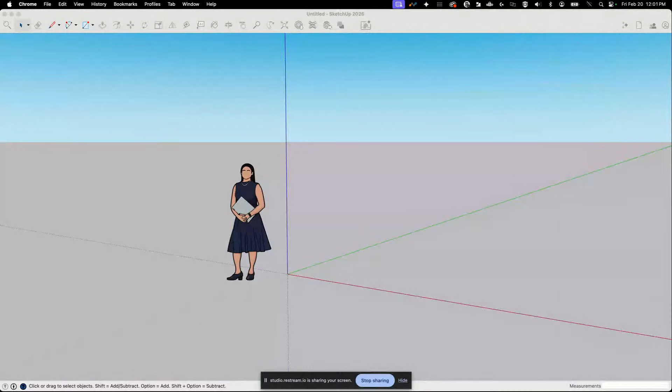Okay, well, hello everybody, it's great to be with you. We've had a chaotic start. Aaron is joining. There he is, just in the nick of time. Better late than never. It doesn't matter how much time you spend setting up or prepping, when it comes time to go live, you're in the hands of the fates. Anything can happen. I had to leave and come back in, so we had to reset up all of our scenes again. That's kind of fun. Yeah, we love doing things last minute. We treat this almost like an improv routine.

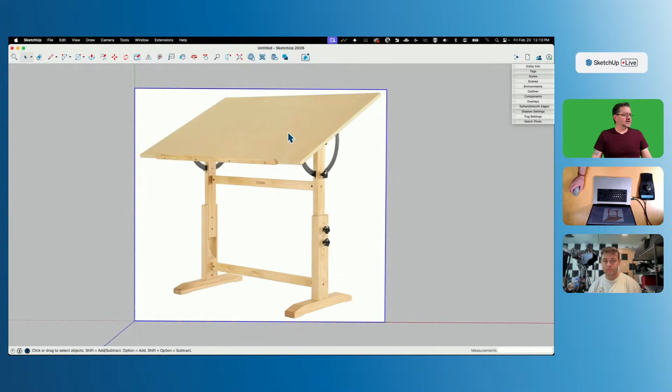I don't know what size this is or anything like that. So one of the things I did was pull up some average sizes of drafting tables that we'll go off of.

Cool. Does anybody have any objections? No? Okay, let's go, no objections. Granted, there's like a 30-second delay between when we're speaking and when you guys are actually watching this, so if the objections come, we've already moved on. Sorry, but thanks for joining in.

All right, so the first thing I'll do is this tabletop. Drawing tables like this come in so many different sizes. Thinking about architectural drawings and draftings, the size I was most used to working with was D size, 24 by 36. So I'd want a table at least big enough to put a 24 by 36 piece of material on, so we'd go bigger than that. I'm thinking maybe 30 inches by 42 inches. So I'm going to go 30, and then come this way, 42.

And it's occurring to me just how oversized this is. Maybe we'll bring this down a little closer to scale, just scale that down a little bit. There we go. All right, so there's our tabletop.

Cool, I'm gonna go to save. I'm doing it earlier and earlier just to try to get ahead of you guys. Yeah, we didn't get a single comment so far, so ha.

Okay, so step 1, draw a rectangle. Step 2, finish the whole table, right? Two-step process. All right, so let's give this a decent depth, maybe like 3/4 of an inch. Something like that. I like it, I like it a lot. Cool, all right, I'm gonna triple click, make that a group.

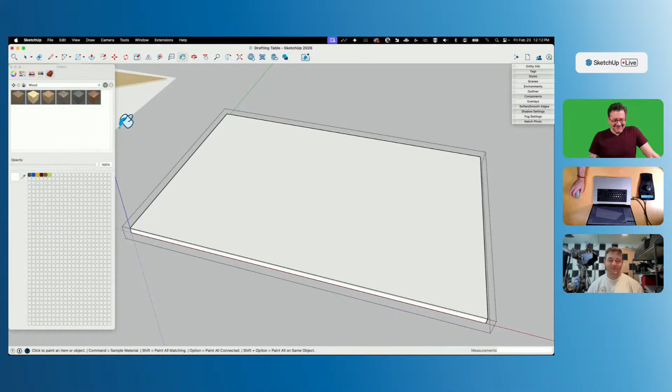All right, so with my default materials, I do have some good wood-looking materials, but it's not the kind of material you'd pick for a wood finish. Knots are kind of fun, but definitely not something you want to draw over, probably. The rest of the default materials are kind of veneer materials, which would be good for flooring or something like that, but that's pretty nice.

Well, what I was going to say is a general comment: when you go in to use these materials, don't get hung up on the color, don't get too hung up on the texture, because all of that's adjustable.

So you can see when you look at this, it kind of has this realistic smudge, like scuff marks. I would believe this would be on a floor, like some architecture students finished their finals on this table. Yeah, I could see it.

So I do like the lighter color of the wood here, so I'm going to make it a little bit lighter. We're going to see if this works. If it doesn't work, that's where we can always hop over to 3D Warehouse. So let's see what we can do with this. As soon as I put this into my model, it shows up in my home, my default materials over here.

Why so many samples? I don't think I need this many. That's an insane amount of colors. I'm not sure how to change the size or anything, never really messed with that before. I guess I'll just slide it down now.

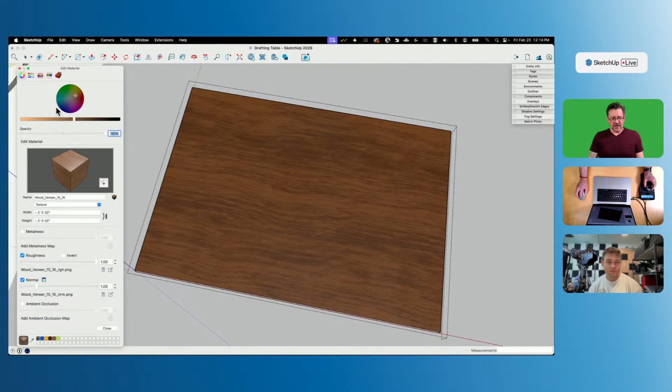So we're going to start by pulling it lighter. Not too bad, but once you go past about here, those browns turn orange, and that's too much. So I'll come over here and slide this a little more towards yellow, towards white - oh, I'm into green already, back it up, back it up.

But it is pretty nice that you can essentially take any material and customize it to your heart's content. It is, it's very cool, it's a nice way to do this.

Right about there - that looks pretty good, I like it. Still has a little bit of that smudge, but it looks like it's kind of been cleaned up a little bit. But what am I saying, that's smudgy - we definitely want it, it's the lived-in look.

Yeah, it's used. I honestly wasn't planning on using that, but when I saw the way the light played across the top, I had to do this. When you know, you know.

All right, so something else I want to do now - we're going to get a little silly. Buckle up, get ready. So if you notice, this whole thing is made out of plywood.

So you can see the lines. Actually, I think these might be solid pieces down here, but all of this is plywood - you can see the veneer or the layers right down here.

So I want a wooden lasagna - are you about to do your own layers? I'm going to do that. Here's how I'm going to do it: I'm actually going to do this on a sample piece over here because I don't want to have to be flipping sideways and working on something small.

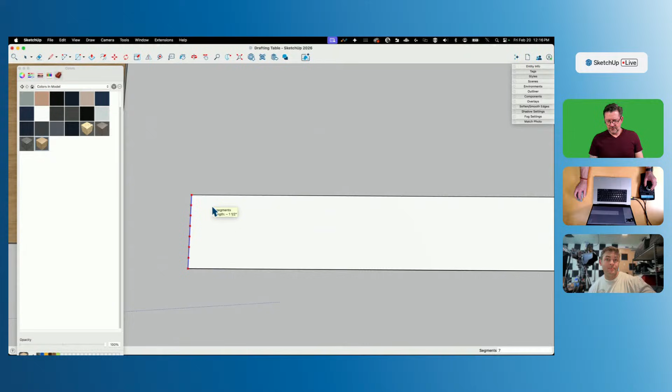So I'm just going to create a rectangle like this, and then I'm going to say divide to that many layers - that's 7, cool. Then I'm going to draw a line down here, take that edge right there, and say copy that to here 5 times. And there we go.

Now what I'm going to do is use this - I'm going to say I want to sample a color, but I want to sample it right from here. I can't do that because this is an image right now, so when it's trying to pick, it's trying to pick an image. What I've got to do is use this little icon - it's slightly different in Windows, but there's a separate icon for the eyedropper that lets you go into sample mode where I can pick any color and it'll give me that as a solid color.

And now it's in my bucket. I can come over here and drop that on every other one of these stripes. Then I'll come back over here again, pick that again - we'll go pick the lighter stripe.

And that's in the bucket. We'll come drop that there, and there.

The sample tool is a wonderful way to get some really nice organic colors in your model. Even if you find a reference image of a scene or building that you really like the overall color tonality of, you can reference the colors in that photo and end up with something much more subtle than the stock colors that come with the Apple palette. The sad fact is that most of our life is in a grayish hue, not the bright colors that show up in the palette.

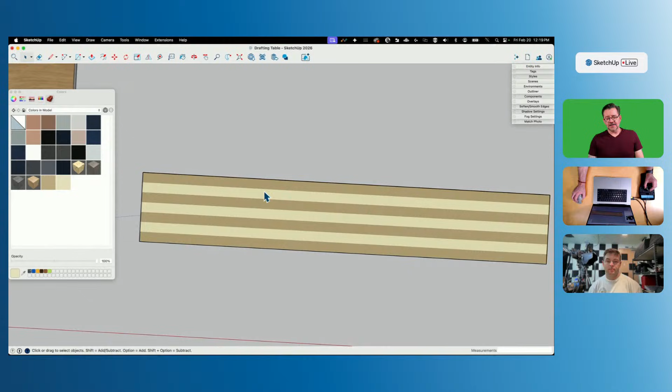Separate actual imported materials, we'd have the ability to create combined materials. Since these are actual just colors, what I'm going to do is go up to view, camera, and go to a top view. This is going to assure that I'm looking straight down, everything's orthogonal, so left and right are straight across, up and down on the screen. Because this is flat, I don't have to worry about going to a parallel projection versus the other one.

So what I'm going to do is just take a screenshot of this material. I'm going to come in here and try to grab it right below the black line, pull it over here to right above the black line. There we go, and there's my screenshot. Now that's just going to get saved to my desktop as an image file.

So the next thing I can do is zoom in here. I'm going to come into context so I have this surface, and I'm going to say File, Import. From the desktop I can just grab that. I don't want to import as an image, I want to import as a texture. Say Import, and I'm going to tell it to go from here to here. And there we go, it's nice that it just tiles like that.

Also, good job cleaning up your desktop before the stream. Yeah, I'm getting better at that.

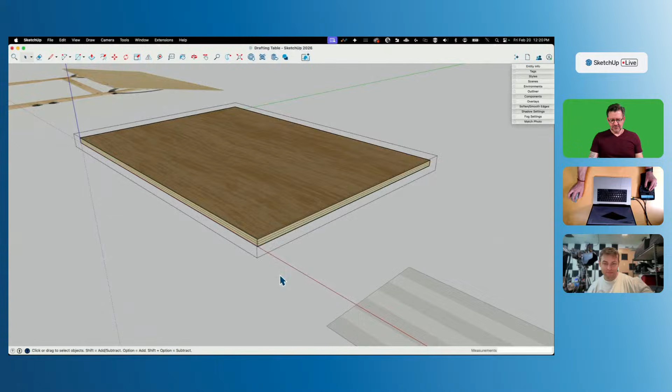So there we go. Oops, I think I did that wrong. Alright, so I'm going to pick that, drop it on each of the sides, and that's going to be our tabletop done.

This is now part of the job, so this material is actually part of the job. If I come in here and look at this piece, for example, now that I look at this, I thought that was laminations, but it looks like that's a solid piece of lumber too. That's actually grain. But if I wanted to make this a piece of laminated material, I could actually scale that up so the laminations look larger or smaller, and reuse it in different scales. So that's kind of cool.

For us, we do need this little shelf paper catcher. Yeah, I don't know what you call this thing.

That's where you rest your pencils. That's right, and let them roll down and go till it hits that. So we're gonna do that. That's where you hit your funny bone accidentally. I was actually noting how they had rounded off corners. Yeah, I'm like, that's somebody with experience did that. That's right, that's design intention, folks. Yeah, that's what we bring here.

So I'm gonna go find the very middle point. So this is 3/4 of an inch up, so I'm gonna say maybe like 1.5 inches. Is that too high? That might be too high. See, 1.5 inches up somewhere around here. That's too much, that's just ridiculous.

Yeah, I'm thinking 1.25 inches. Okay, 1.25, enter. There we go. Okay, that's how high it's going to go.

And then I'm going to run it over here. I want to go the full length because I don't know why they don't ever go the full length, but they don't. So I'm going to come over a nice round number like 1 foot 3 inches.

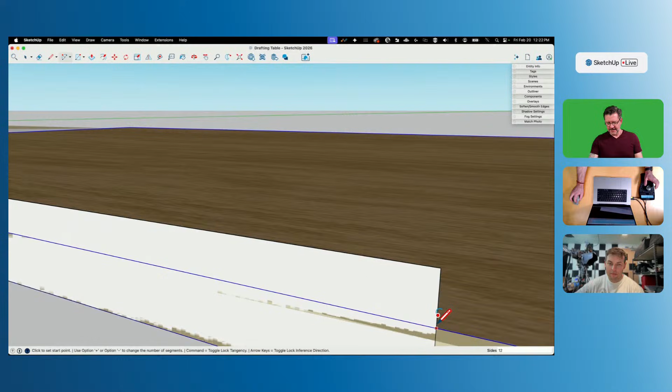I'm going to drop that down, bring it over. There's my face. And I'm going to round that corner off now. So I'm going to come here to A, put an arc from here. I'm going to let it go to tangent. Click twice. There we go.

Now I'll take that piece and I will mirror a copy of it because I want to keep my original right here. Get rid of that. Then pull this out, probably like a quarter inch maybe also. See what that looks like. That looks good. That'll work.

Cool. All right, so I'm going to grab all of that, soften it real quick. So get rid of that. And then I'm going to say, okay, now let me sample this material.

Nice, there we go. Now, one of the things I could do - oh no, it actually turned out pretty good. Looks like right here is a little off. If I want to control the orientation of materials on broken faces like this, it can get a little tricky.

So there's a couple ways to do this. I'm going to do it. It's probably more work, but it's probably the quickest way to do this is to reorient this one on the flat and then just copy it and paste it up on each of these segments.

So I'm going to do that real quick by first going to View, turning on Hidden Geometry. Then I'm going to click on just this rectangle right now. Hidden Geometry makes this, what was a joined surface, into individual faces here that I can work with.

So I right click, I'm going to say Texture, I'm going to say Position, then I'm going to right click and I'm going to say Rotate 90 degrees and Enter. Okay, so now that's going the right direction.

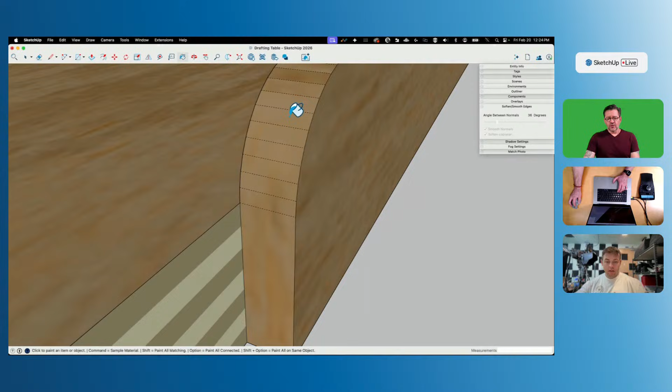So to get on each of these, I'm just going to sample that, sample that, sample that, sample that. So this is one way to do it. One of the other options I could have used would be to create a projected texture, or multiple versions of the same texture projected from different directions that I could then have applied, but I didn't want to.

Yeah. Looking good. Are you going to add the screws?

Maybe we'll come back and do connectors after. Yeah, no, you're right, I'm getting too caught in the weeds here. Forget that we have an entire rest of the table to make, and we're already almost 30 minutes in. I know the tabletop went so smooth, you would just think it's all going to go wonderful. And I hope so, I hope you're right. I hope Justin is on the ball with that optimism. Yeah, we keep shifting who has the sense of confidence in this room.

All right, so I'm just going to leave it right there for right now. I'm going to go to View and turn off my Hidden Geometry. I'm going to triple click. I'm going to make that into a new group.

Could you make that a component? Yes. Would Dave have made that a component? Probably. Did I? Apparently not. Yeah, that's all I can say.

All right, cool, so there's our top. I'm going to take these two pieces now, and I'm going to make them into a group. And that's just going to keep them together, so if I move one, the other moves with me. This is just basically assembly grouping. There's nothing to that as far as parts or anything like that where that's important. It's just keeping those pieces connected as I start moving them around.

Because what I have to do is I have to lift them up off the ground, and then I'm also going to tilt them, and I don't want to do that one piece at a time.

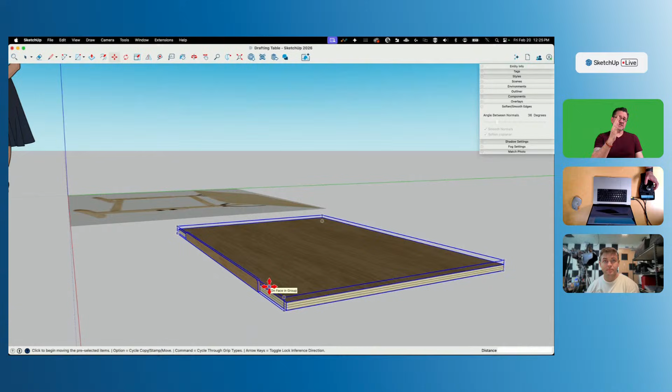All right, so let's talk about height. So if we're at a standard height, then this would go vertical about 36 inches. So it'd be that high off the ground being right here. That's a standard height for a drafting table, which I think is like stool height, 3 foot. Does that sound right? I think so, sounds right. Yeah, we're gonna say that's right.

And then the other thing I want to do is I want to give it some angle. I want to have it come up.

Drafting tables usually go between 0, which is flat, and maybe 45 or 50 degrees. I'm going to grab it by this corner and rotate it up, let's say 35 degrees. That looks nice. So that's 35 degrees, 3 feet off the ground to the bottom, tilted up 35 degrees. I like that, let's build a table around that.

Okay, next thing we got to do, let's start at the ground and work our way up now. I'm gonna come in here and draw some feet. There's probably a rule about how wide feet are compared to the table that supports them. I think they're less than the table when it's flat, but I don't know, I'm making crap up now. Since when do we care about rules here? The SketchUp Live, that's right.

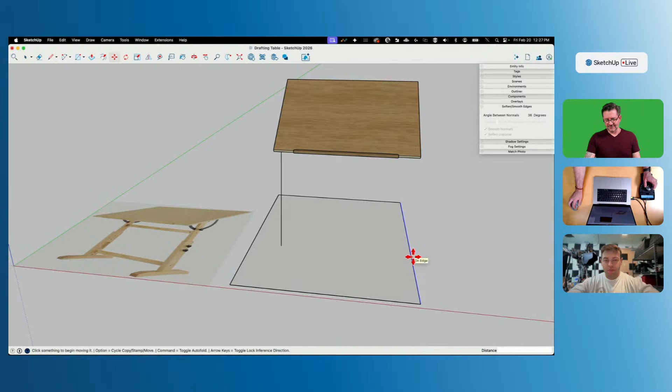All I'm going to do, I have my ground plane here. This is just my temporary ground plane, just so I have something to work off of. Not a requirement, you don't have to do this. You could always use the origin as inference for where 0 is. I like this because it's a quicker, easier thing to snap to. So yeah, I'm doing that.

I'm going to put some feet on here and just kind of eyeball this and see what I think is good. If that's from the middle, it comes out a foot. Let's see what 12 looks like. You're just drawing straight on the ground plane, huh? It's drawn on the ground plane.

Nice, that's right, then we'll come this way. Maybe this is made out of nominal, like a 4x4 or something. We'll say it's like 3.5 inches and come back this way, 24. I don't know if this is going to be big enough, I think it's going to have to be longer than that. I think that actually looks pretty good. That'll work. All right, Justin signed off, we're good.

All right, so I'm gonna take that up 3.5 inches. I said maybe this is a 4x4 you got in the reclaim bin at Home Depot or something like that. What I want to do is come in here, I kind of like this detail, it's cut off at an angle. You have a little bit of a step up, there's a reason you do that, I don't remember what it is.

You got the angle and also a little bit of rounded corners on the angle. It's nice, I did see that. The best of both worlds. That's good stuff, that is good stuff, that's great, great design.

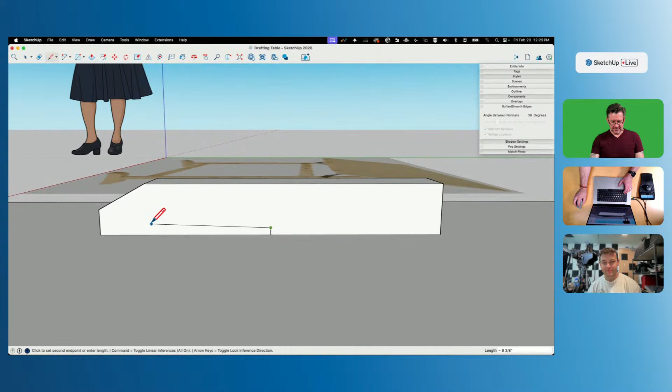From the middle here, we'll go up like 0.5 inches, come out to here again, drop down. Now what I'm gonna do is grab this edge and this face, and we're just gonna mirror a copy of that to there.

Yeah, and to mirror the copy, you're holding down a modifier key, right? Right, that's right. And yes, we do say modifier key rather than calling out what the key is because it is different on different operating systems.

All right, so a thing I just did, I drew all that, which I mean this looks good, I like this, this works. It's definitely thicker than, or maybe not, I don't know, I don't care, I'm doing my own thing.

Because I drew this on top of this plane and pulled it up, this is all one piece right now, so I never grouped it. What I should have probably done is as soon as I drew that first rectangle, double click, right click, and hit group then. Dave R has already called you out, should have grouped the face on the ground plane before starting on the foot. Yeah, absolutely, Dave R, keep us honest here.

And so I see that you've turned that into a group. Would you consider turning that into a component so you don't have to do it twice? Absolutely, should have from the start. Make component, I make mistakes so you don't have to. Foot thing, yeah, we'll just call it the foot. I don't care, it's mine, I can do whatever I want. All right, so now that we have that, so what I created, a thing.

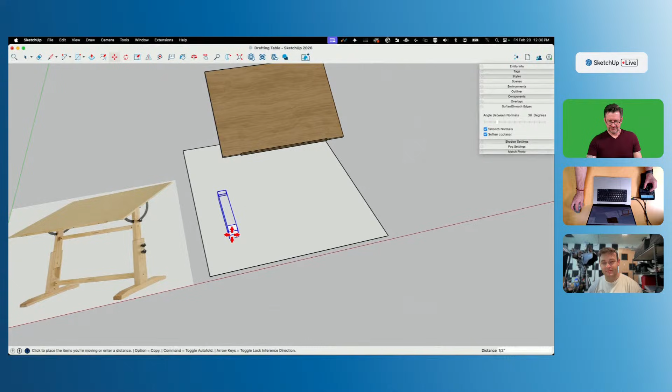Okay, we're good. Oh, this is an interesting thing that's happening. Let me explain. So if I take this and slide it over here, this is a solid plane. This is an object with open ends. But if I drag that back onto this surface, look what happens.

It cuts holes in there. So I inadvertently made... let's go to components and edit this one. I accidentally made a component that glues automatically to flat surfaces and then cuts an opening out. So if I dropped another one of these in right here, it would cut that opening too. I didn't mean to do that. That was not on purpose.

So there's a couple things I do to fix that. The easiest: right click and say unglue. Once I do that and we move it off, we should be good. I'll turn off cut opening also in the component's properties. Now if I move it back on, I think this will still work. Yeah, there we go, see how it stayed on the outside. It didn't cut the opening again.

So sometimes you do fun stuff in SketchUp and don't even know you're doing it. I know, but the cut opening thing is really nice if you're ever putting windows on the side of a building, it prevents so much modeling work. So for sure, it has its merits, but not with table feet. No, that's not where you want to go.

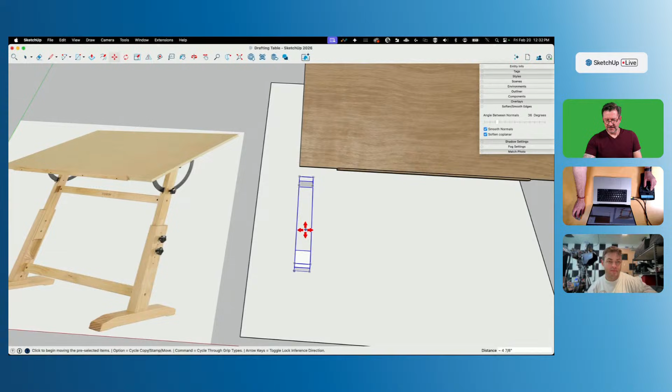All right, so I'm going to bring this initially out flush to the side, and then probably not all the way out to the side. We want to be a little bit back because I don't want this sticking out past the tabletop. So maybe I'll move it in like 4 inches. Okay, looks good. Yep.

All right, I'm going to come in here, double click, fill all connected faces with that wood material. Whoa, things got silly, I'm going to undo that. I'm going to do one at a time instead. I don't know why that happened. Keep me on my toes.

Now I'm going to fill the rest of this with... I don't care what. There we go. Okay, so there's our 1 foot.

I'm only going to build half of this, and then I'm going to throw that all into a container and copy it over. There's no reason to copy each piece as I go.

So with this next section, I made this a little wider than this. This looks like it's maybe a 2x4 material, and then this is maybe a 2-inch material, something like that. But I'm going to make this lower part out of the same 4x4 size material here.

So what I'm going to do is grab a rectangle and come to this middle point. Just come down this way, catch a middle point off of here, bring it to here, right there. Hit the modifier key to draw from the center, and then just pull out till I get a square, 3.5 by 3.5. Where are you at?

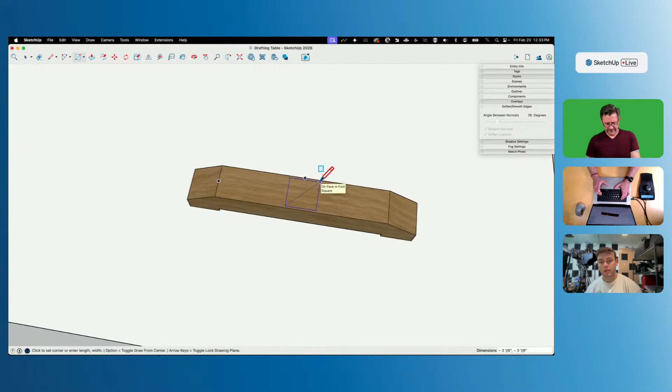All right, 3.5, comma 3.5, there we go. Cool. And then we'll bring that piece up 1.5 feet. Yeah, 1.5 feet. All right, there. Cool, looks good. I'm going to save.

Yeah, good call. Yeah, so I do good things.

All right, so now what I need to do is we're going to put a pocket in here that this piece right here will run into. So this is going to be a little weird because this will be awkward. I think you can offset that. That's true, it's like 3 sides. It's like these 3.

Offset like a half inch on each side. Let's see what that looks like. Yeah, I'm going to say 0.5. There we go. And then I'll take that face and push it down like a foot.

I like how much of the stream is just kind of loosely seeing what feels right and then being like, yeah, that's the dimension. It's sculpting, man, it's crafting. That's right, shooting from the hip, modeling from the hip. Sometimes you think too much, but not here.

Yeah, all right, so I did a fill all, and that's become, as I'm using more and more materials, I'm using more and more of these built-in commands like that. So when I come in here and I say okay, I want to fill this, holding the option key says fill all connected faces, everything's the same material. So if I just click right here, it fills one.

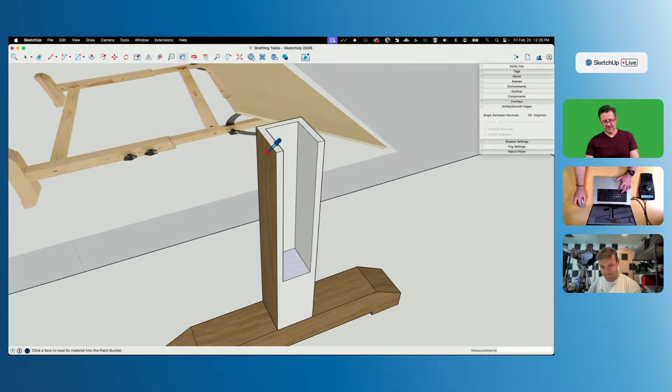If I hold down my modifier key and click there... I gotta undo that. It's going to fill anything that's connected with the same material, so in that case, that's all those white surfaces. I like that, because I can't tell you how many times I'll click into a group, select all of the geometry, and then paint it. So it's a nice little hack. Much, much better.

A lot of these turned out right, ran the right direction. I don't care so much about the end, to be honest, but that looks okay. Down here, I feel like this grain needs to run the other direction. I don't know, I guess it's right either way. This one's definitely not, so I would right click, texture, position, right click again, and rotate it 90 degrees. Nice, and then that should be right. This one's probably gonna look wrong either way, but we'll cover that up. It's end grain, which we don't really have an image for, but you won't see it.

As I'm looking at this, I'm going to make this back wall a little bit thicker, just to give me a little more meat to put some screws into. I'm going to triple click and make that into a component, and I'm going to call this the lower leg.

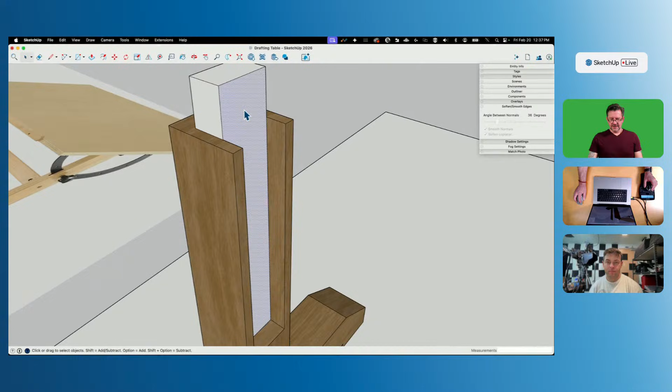It's coming along, yeah, that's right. Now we're going to do a new rectangle right here. Oh, that would be a big piece of wood, we probably need to make that smaller. I'll bring that up like 14 inches. I'm playing with stuff. I know, we're sculpting, that's right. And then make that a component.

I feel like you've gotten really proficient at using materials and also naming components. That's a tough thing, I sometimes get a little lazy, and before I know it I'm trying to find component number 96 or whatever, and it's tough. It's years in the making right here.

Oh actually, I'm looking at that bottom, the lower leg, and it kind of looks like it's curved. I was wondering, was that my distortion? No, like where the upper... oh yeah, it slides in, cuts in there. We could make that happen.

I'm gonna make this a little bit longer first, another 6 inches. Maybe this is another 6 inches too. Yeah, something like that, we could definitely add that. Let me think about this, we'll come back in here. How long is this? 2.5. So I'm going to push a copy of this down 2.5 inches, 2.5, enter.

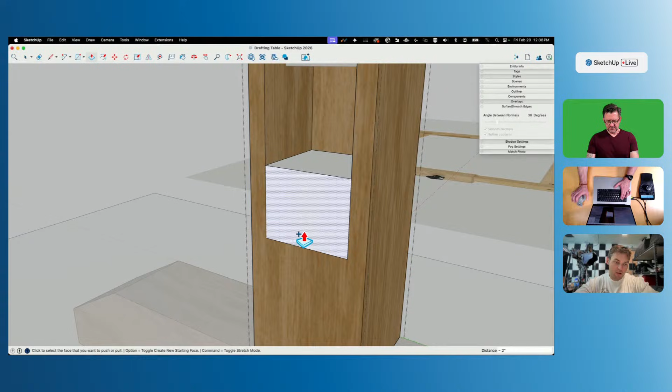If I erase this, now we should have a nice surface to work with. I'm going to grab an arc from here to here, and then pull it back. I'm not really too worried about tangent. There we go, and I can just pull that straight across to there.

Nice, oh that's a cool little thing that happened there with the texture. Yeah, so we got the same thing we had on the side of the pencil, not rolled off a machine thing.

So I'm going to do the same thing. We're going to go to view, turn on hidden geometry, and then just real quick, I'll sample this and say here. And just drag that material across. We're just clicking and clicking.

Told you, we talk a lot, but we're going to have much more clicking. Dave R is chiming in the comments with how he would build this, and I promise you that is a more practical approach. But he probably would have thought about it before he started clicking. That's the difference, we're doing it live, Dave R. That's the difference between me and everybody else who would be doing this, they would probably do it smarter.

Okay, that looks pretty good though. Oh, looks nice, looks nice. Don't forget to save. Let's save it. So we have 3 components here.

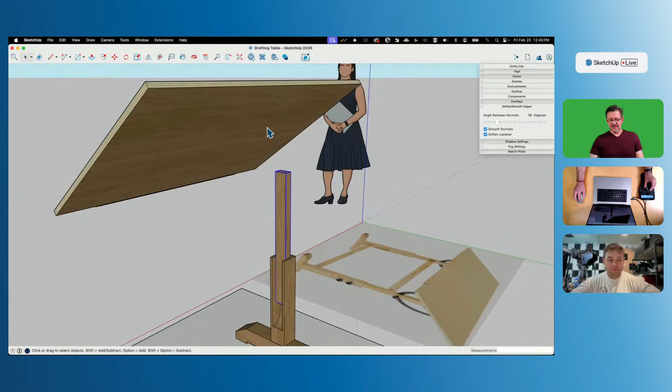Making up this piece, and I just kind of ran this long. I don't know where this actually needs to go, but I think actually both of them need to be longer, because if this is 36, standing height would be a little taller and sitting down height would be a little lower. So we need to give a little bit more length. I'm going to grab the top of my lower leg, give it maybe another 4 inches, 6 inches.

Yep, and then slide that up. Give this, grab that, slide that up. Is it hitting at 4? Oh, it's coming real close at 4. So I'm gonna say, yeah, about 4 inches. Cool, all right, looking good, looking cool.

I don't like this, I feel like I want to round that. Yeah, so I'm gonna... why not? Why not indeed, it's Friday. It's Friday, do what you want. Yeah, do what you want.

So we're just gonna go, whoops. I'm gonna inference off of this, pull it straight across. Whoop, whoop, whoop, sorry, got a little jumpy on the old 3D mouse there. Okay, from here, and then can I inference straight across from? I guess I can't, so I'm gonna have to draw a line from here to here, and then draw an arc from here.

We're gonna draw a line from there. That's interesting, it's inferencing off of this point, which I don't really want it to do. So I'm just gonna stick another line right here and see what happens. Now can I inference without? There we go, now I'm inferencing in the right spot. Sometimes software tries to be smart, and you gotta get some human smarts up in there.

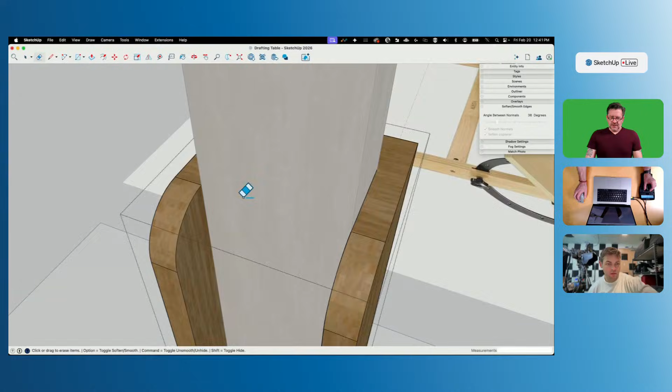Ty says, I'd build this by surfing the Craigslist free section.

Well, that's a much better deal than what I'll charge you for this, especially since I'm making this out of $300 sheet plywood. Yeah, this is some nice birch. Not a bad idea, not a bad idea.

All right, cool, so I don't want to go into a whole lot more detail there. Because what I want to do now is, it's not showing under here, but what I'm assuming is happening here is there's some sort of a hinge piece here that this top can move back and forth on. And then that's where this piece of metal allows it to, at certain degrees, be screwed in and tightened.

So as I think about that, what we basically want to do is go from the middle here straight up till it hits there. And then something between here and here is going to create a hinge. I'm also gonna check and see where the middle is here.

That was the wrong direction. All right, try that again. Find the middle, draw a line straight across. There we go, oh yeah, we stayed in line. That's good, yeah, good to know.

All right, so what we need to do is, I'm trying to think of what would be the best way to do this. Probably just like a bent piece of metal. So round this all over, a bent piece of metal, an L plate that hangs down, and then a bolt through it would be probably the simplest thing. So we'll do something like that.

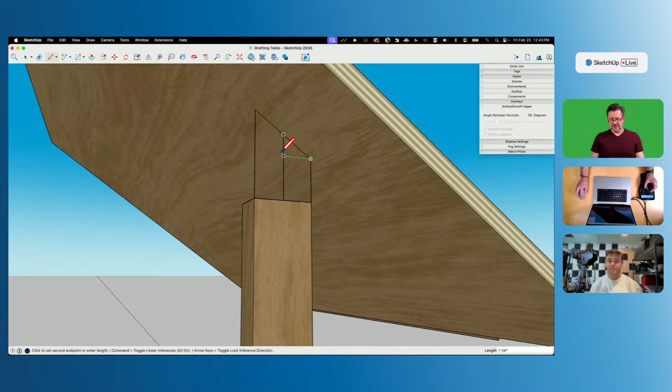I'm gonna go from here straight up till I hit, go from here straight up till I hit. All right, and that's gonna be one piece of plate. That will go to here. So this, I'm modeling in 2D right now.

So something like that would be what my plate looks like. Then this piece would just come up and round over inside that, and then we would have, yeah, then stuff would happen. All right, let's start here, like that. Push that across to here.

Gabrielle on YouTube says it's not hinged, it's usually more of a track. That's interesting, let me think about that.

Yeah, oh, this probably wouldn't be at an angle. This would be flat too. This would not be, this is wrong. Okay, we're good.

A track. Because I'm trying to, again, I'm reverse engineering this. Because if it has to stay in the middle, if this is a perfect circle, half circle here, then the pivot point would have to be directly in the center of that. And this wouldn't be structural, this wouldn't be holding it up. This would just be adjusting, locking it. So the actual connection would be structural, be up here.

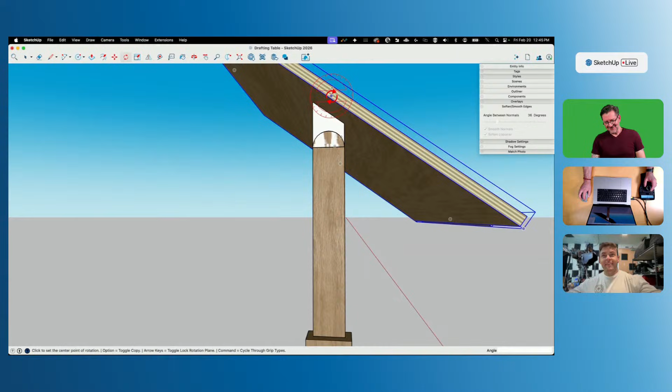I'm going to rotate this, and we're just going to rotate it flat. And I'm going to build my bracket flat, and then that's not quite flat. Flat-ish, flattish.

Go grab this point and pull that point to on axis. There we go, that's flat. And that's going to change this, because this edge is going to go straight up to where it hits, and then this edge, which went right through the top, is going to drop down vertically to where it hits. Something like that.

Coming in here, I'll probably grab this piece, bring it up more so it overlaps better. And then come back out here. Maybe we'll even do something like this. We'll put a circle right here. Get rid of that, and then we can bring that vertically to maybe here.

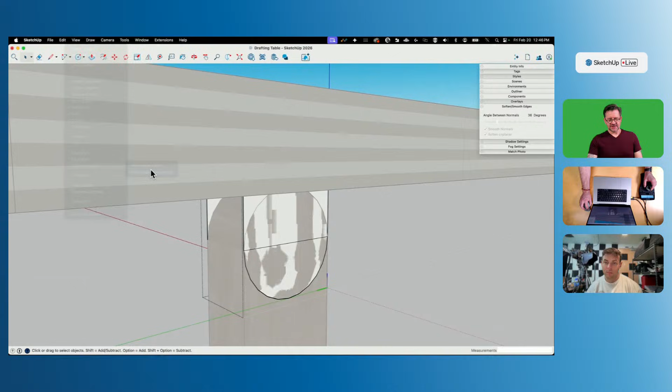And I'm going to triple click all this and make a new component. Let's go to view, and we're going to go to component, edit, and hide rest. Nope, that was the wrong one. Hide rest of model, that's what I wanted to do.

All right, I'm going to take that piece across to here. And worry not, you worriers out there, I am not going to leave this as an infinitely thin piece of metal. We will bulk this out. So everybody calm down, just relax. It's cool, man, we got this.

All right, so I'm going to put bulk onto this. I'm going to come out this way, not a lot, like a 16th inch. This is not like, I called it structural earlier, in that it's holding up a piece of wood. So get a good strong piece of steel at a 16th of an inch.

There we go, nice. I'm just going to go draw a line right across here, get a nice break point. And then there's a couple ways I could do this. I could try running cleanup, I could run solid inspector. There's a couple ways, but as it's a couple of edges, just coming in here and erasing these extra pieces is probably one of the quicker ways to clean this up.

Your choice though, kudos for cleaning it up in general. I feel like I would have just painted it with a really dark metal. Or you could just soften and smooth the whole thing. Exactly, there's lots of options there. Yeah, but like we talked about, I'm a new guy.

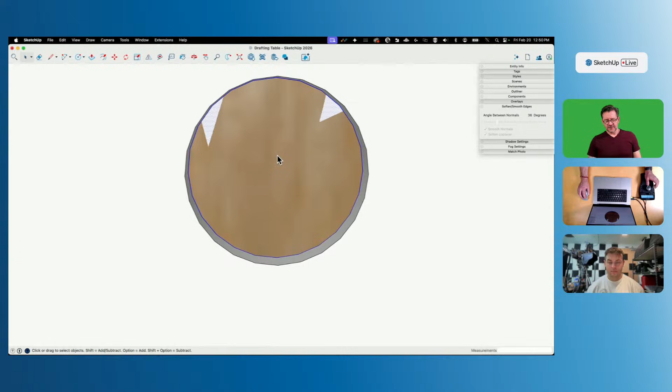This is the way I'm going to do it. I'm going to come in here and draw a new circle. I'm going to inference the center of this circle, pull it out to here. Then I'm going to double click, not right click, I'm just going to go up to edit and say cut. Now I'm going to double click on this piece of wood, I'm going to say edit, paste in place, and that circle drops right onto that face. Now I can just pull this across like that. When I come out here, there we go, my holes align.

Yeah, that paste in place is so nice. It is one of my favorite commands for sure, not just because I regularly forget that I'm editing a component and have to copy and undo a bunch and then paste in place. It's nice. Oh, it's nice. Keggy's asking for the keylogger. Yeah, I didn't want to interrupt your flow there, but good call, Keggy. Yes, I can, yes I did it again. Yeah, you're about to see how terrible Aaron is at typing.

That's great. I finally have a decent excuse for why I type so bad. If you use a MacBook, it has this incredibly ultra thin keyboard and the keys travel about a 32nd of an inch or something. And I have a mechanical keyboard on my desk, and I think switching back and forth is causing my typing to get even worse. I'm like, nope, move your fingers more. Nope, move your fingers less. I'm not good at it.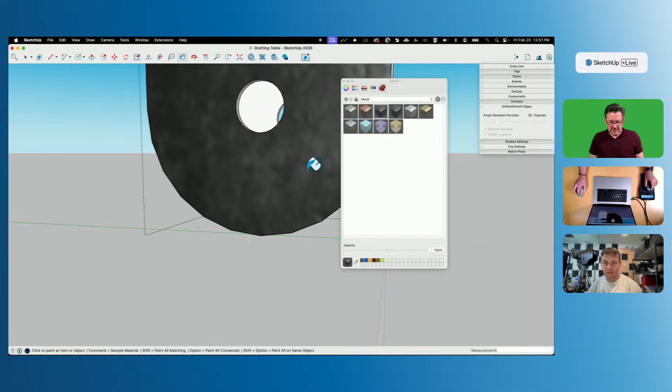Anyhow, moving on. I'm thinking a nice black metal to offset against our light wood might be kind of cool. So I'm going to grab my paint bucket again, go into the materials and find a nice metal. Oh yeah, maybe this. That looks good. I'm going to color the whole thing with that dark metal, and that's my metal color. I love that industrial look.

Paracad on YouTube says when he creates circles he uses like 96 sides. Is that too many sides? It depends on what you're doing.

I think Aaron and I would both tell you it really depends on the level of detail that's appropriate for the model. If you're modeling something as small as what Aaron's modeling right now, you maybe don't need that resolution. But if you're doing something much bigger, it's nice. If you have too many sides on your circles, it might bog down the model a little bit. In general, I feel like you should try to keep your models as lightweight as possible. But hey, I'm with you, I like a smooth circle too. So sometimes 96 sides is great.

I won't argue with 96 sides. I know some people go in there and put 999 just to max it out. Don't do that, that's not the way to do it. I didn't even know you could have that many sides. That's the max, 999. But 999 is a terrible number to use because it's not evenly divisible except by 3. So actually 96 is pretty conservative, good job, that's not too bad. I'd say if you were working back in 2017, that would be a lot of extra geometry, it would probably bog down. But SketchUp's more performant now than ever before, so I'd say you're probably okay.

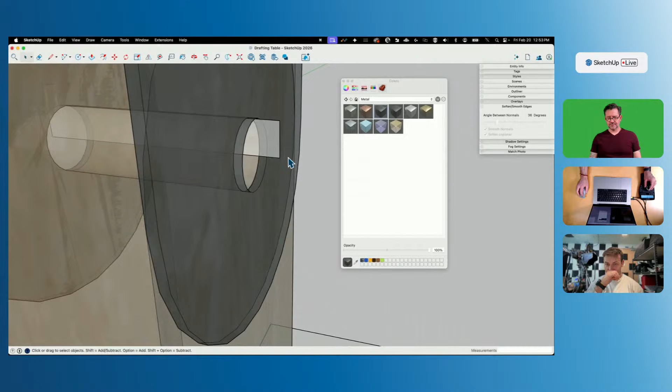While I went on my little monologue, I see you've created a shape you're intending to use Follow Me for, right? So you've drawn a profile. I'll grab this circle, we'll say Follow Me with this shape, because this is some real magic there. Kind of a bolt looking thing right there. Nice, that looks great. And then I can get rid of this.

I will triple click here, and first, before I do anything else, I'm going to color it with that same black powder coated metal, maybe. And I will make that a new component, and I will call this hinge bolt.

I did toggle on X-ray. The reason is this dark metal is actually kind of hard to see lines against. If I click right here, it's very hard to see that line. That's not bad, it happens, not a big deal. But if you run into that, a couple options are X-ray, because it makes everything lighter, easier to see lines and edges. The other option would be to go up to View, Face Style, and switch to Monochrome, which lets you build on that classic white SketchUp background.

So I'm going to take this and bring it out maybe that much more. Cool. I feel like I should put something on this side, like some pin, kind of a pin that pokes through a hole. Or you could just duplicate the bolt head on the other side. Let's do this, it's not practical, but it'll be a fun thing to draw. That's really what we're here for, right?

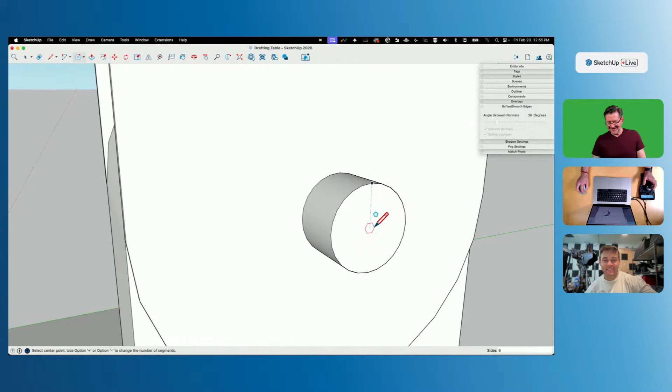We're chasing fun. I'll grab a polygon, go inference the center of this. This is not a circle, so I can't immediately hit the middle. But if I come to the top point and one of the furthest left or right points, I can inference the middle there, and I can come up. Let's go this way.

All right, I'll do a circle from the middle there. Delete that, push this through like that much, and we'll drop that against there. Like I said, it doesn't make sense to have a bolt there necessarily, but it looks cool.

I probably would want something other than a big flat round space here, but I don't have that. All right, switch back to our materials, face style, photoreal materials, and then I can color all of this and make it into a component, which would be my hinge bolt nut. You know, like you have.

All right, so there we go. That looks pretty cool. Now what we got to do is get this piece on here. This is going to be fun.

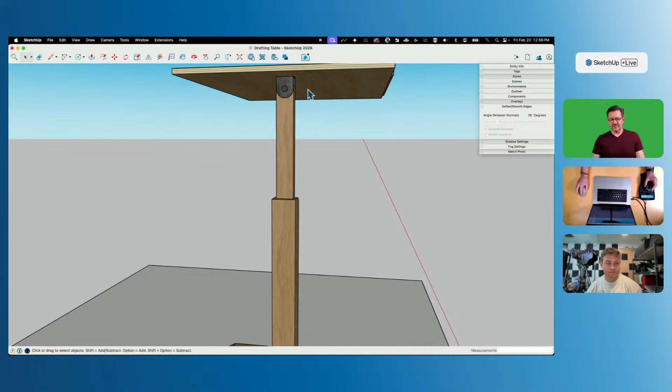So I want to make a circle, but it has to be based off of my hinge point, so that'd be right here. Better go back to my face style monochrome so I can see where that is. All right, so the middle of this point, I'm going to come in here with a circle and go inference to the middle there.

There we go. Where I pull this out to is going to determine where I start building this thing right here. I don't have a specific spot for how far you pull it out. I want it far enough so it's a little ways out there. I don't want it up here because that creates a very small, tight situation. But I don't want it so far down that I can't drop any lower. So maybe, I don't know, 8 inches down. Yeah, 8 inches down, 999 sides. Perfect.

All right, so that made a big old circle based off of there. That's fine. What I'm going to do is come here, draw a line straight up till I hit the top, come straight over to this point, and then drop back down. Get rid of this geometry up top.

There we go. I'm going to grab this, minus this and this, right click, weld it. I'm going to offset, I don't know, an inch. This doesn't have to be very big. Yeah, I'll say 1, and get rid of this. And there's the beginning of my this.

So let's say that you drew that. Let's say I did. Well, I mean, you did. It's true. But so you drew this, and it's looking a little rough. Is there any way that you can, after the fact, change the amount of sides per curve?

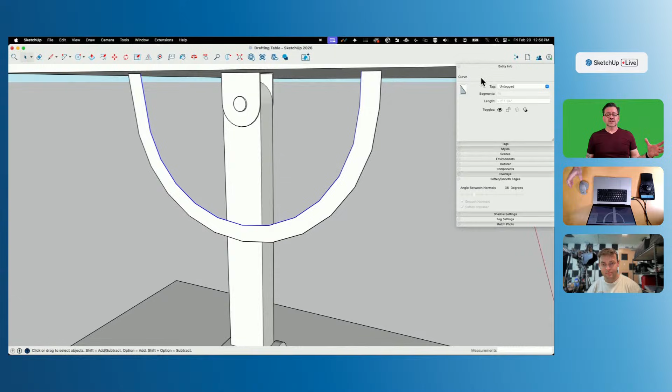So basically what I say is pick on it, grab it, and bring up entity info. If you get an editable field here, then you're golden, and you can make that change to whatever you want. If you can't, it's because this is no longer a circle or an arc, it's now what's called a curve. A curve is just a connected group of lines. There's not necessarily a curve that looks like an S versus a U versus a squiggled line, they're all curves. So there's not an even way to break those down. There are extensions out there that will do that.

Ooh, I was off here, I drew that wrong. So what I would do, because I agree with Justin 100%, that's a little rocky, let's up the number of sides there. I'm going to hit undo a couple times so I get back to an editable piece, which is probably me right about here. Yeah, all this talk of 999 sides has really gotten me inspired to make some smooth curves.

I like it. All right, so when I get to there, now if I select this, this is still half a circle, and it's 24 or 12 sides. So if I bump that up, say 24, see how that looks? Oof, nice, it feels like twice as smooth. Yeah, let's go to 48. Whoa, 4 times as smooth. Whoa, you guys, that's smooth.

Wow, okay, so I'm gonna go with 48. I'm gonna come out here and get rid of this little vertical edge. Because my pivot point isn't flush to the top, I'm going to have a little bit of vertical right here, and then the curve starts, and I'll have a little vertical here. But that's fine, I like that.

I'm going to grab this because this is an arc and 2 edges, right click, and say weld. As soon as I weld it, going back to what we were just talking about, this becomes a curve. So where this was an edge, an arc, and then another edge, now it's one continuous curve. You can see I have 50 segments in there, but I can't edit it.

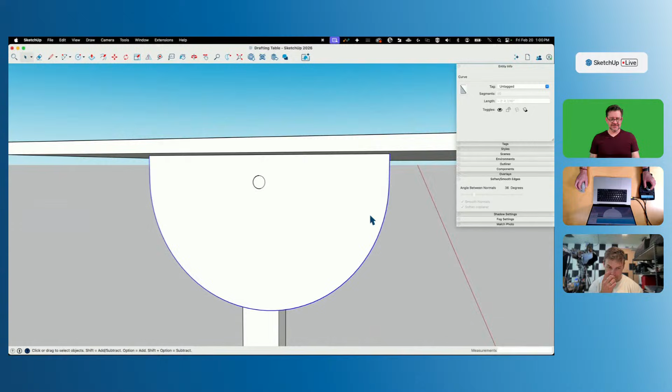Gus Burt says, show us 999. Paracat says, boss move. So we're getting conflicting directions here, but I agree, I think this is looking smooth.

I also want to echo real quick that it's really nice to model in monochrome if you're dealing with a lot of textures. Frequently, if I'm modeling something and I have a lot of textures going, I'll save a scene that's texture heavy, and then create another scene that's just monochrome and treat that as just a modeling scene. So it's kind of nice to hop between the two.

Well, since you mentioned that, let's do it. Right? Because it's our show and we do whatever we want. The other cool thing you can do when you save that scene that's your quote unquote modeling scene that's monochromatic is turn off the camera location property, so that anywhere you're orbiting in the model, you can just quickly shift to monochrome.

That's right, so we'll turn off camera, and actually the only thing we really want is style and fog. That's really all we want to save, or not style -- we also want to save fog. We want to save the item that is style and fog; they're saved together for some reason. Yeah, stay tuned until we add fog to the scene. That's going to be epic.

Because that's how architectural offices are -- it's the smoke break. Ooh, misty.

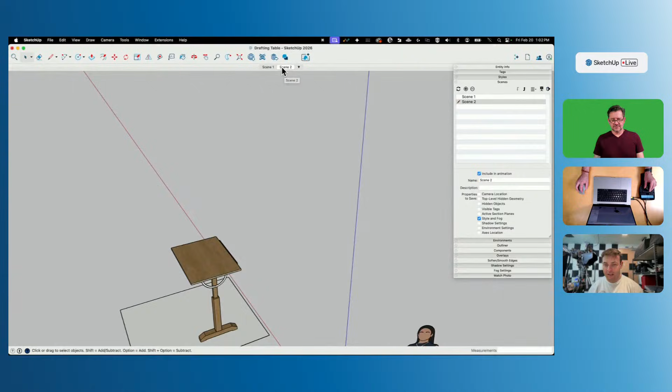So I'm just going to go ahead and create that, and right now not going to change anything. I'm going to immediately come over here, go to View, Face Style, go back to Photoreal, and hit New again. All that just created 2 scenes that all they do is change our style. That's it. It's a really nice way if you're ever trying to get into the nitty gritty of modeling something. Definitely encourage you guys to look at the various properties you can save to each scene -- you can do some cool stuff with that.

I think it took me years to really fully appreciate -- no, still not right, appreciate -- I talked a lot this week and I kind of used it up.

We have a picture of the underside of these tables on the forum that just got posted, so thank you for that, folks. Am I too far gone -- I think we're too far down this path, but it's good to know what it looks like. Awesome, I don't have the forum up, so that's my excuse.

One of the other things this will do, because it's part of the style, is hidden geometry. So as soon as I toggle this, all my hidden geometry goes back to hidden. I can leverage that, knowing that's what happens -- I can make that be a good thing.

All right, so I started with a hole here, or right now it's just a circle. I want to put this -- let's see what it looks like every 5 degrees. I'm going to go grab the middle of this again. I should probably just put a reference point or a snap point there, but this is the last time I'll do it. So if I come here, option, and go to 5 degrees, that's a little close. That's 5 degrees, so let's go to 10 degrees.

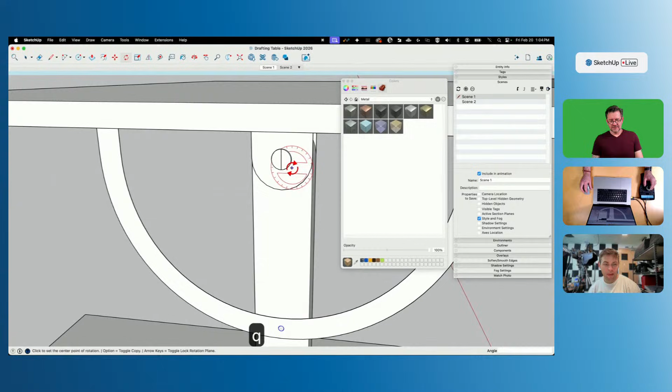And then I can come here -- oops, I grabbed my point again. I'll rotate from here to, I'll go 90 degrees. I don't think you could actually do this at 90 degrees, but I'll do this and then say divide by 8. Boom, there we go. And like I said, I don't think you'll be able to use this one or even this one, but we'll see. All right, and now I'm going to grab these.

And then we'll just mirror them. Yes, because why not, why not. Oops, grab the wrong one.

Paracat on YouTube says, where is the tip jar? This is a great class. We will be handing out our personal Venmo information soon.

It's tip enough to hear that you appreciate it. Yeah, thank you for the kind words.

All right, so we've gone over stuff like this where we're creating a sheet with a bunch of holes in here. I could come and select each of these faces and delete it, or I could just grab this piece, make that my component, and say this is going to be my... what do we call this thing? Bar thing. I see you've read my book on component naming. Yeah, of course. Once I do that, now all of this extra geometry is loose and I can just delete it.

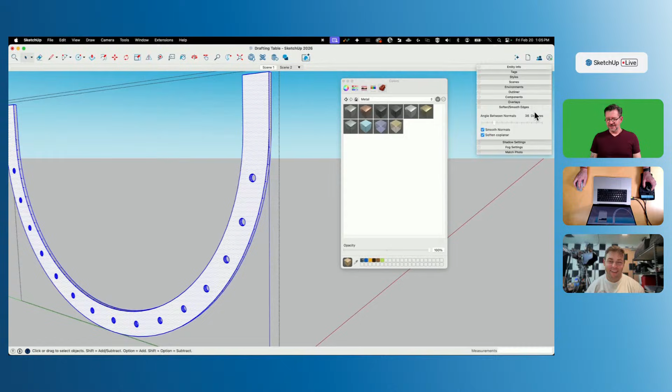And now give this some thickness. I'll come in here and make that. Dave R said, delete the face inside the circle before copying it so that you don't have to select and delete all the faces. Thanks for that, Dave. That's another way to do it that I did not think of beforehand. Absolutely true. Yes, that would be a very smart way to do this.

For sure. All right, so this piece is going to have to connect onto the tabletop. So I'm just going to put some tabs up here. I made this 1/8 of an inch. So I'm just going to grab this edge right here, drop that down, a copy of that down to 1/8 of an inch, and we'll pull this out like 1 inch. Cool. And I could copy that over, but sometimes repetitive input is just so quick and easy that I don't stress too much about copying geometry or faces or stuff like that. It's just easy to do.

All right, and then I'll take that whole thing, and what I want to do is get it lined up with the middle of this piece. So I need an inference. So what I'm going to do is draw an edge across right here. I'm going to grab the middle of that. Because it's not highlighted, after I move it away, it's just going to be sitting there. So this is just temporary geometry just for this one move I'm about to do. I'm going to hit the right arrow to lock to the red, and then I'm going to go find a midpoint. And there we go, that's right where it needs to be.

Boom. So last couple things, let's clean that up. I don't need this anymore, get rid of that reference geometry. And then I got to come in here now. But you've turned on hide rest of... I did, so I have to come back here to component edit, get rid of hide rest of model. And then what I'll do is draw a rectangle that's exactly that face.

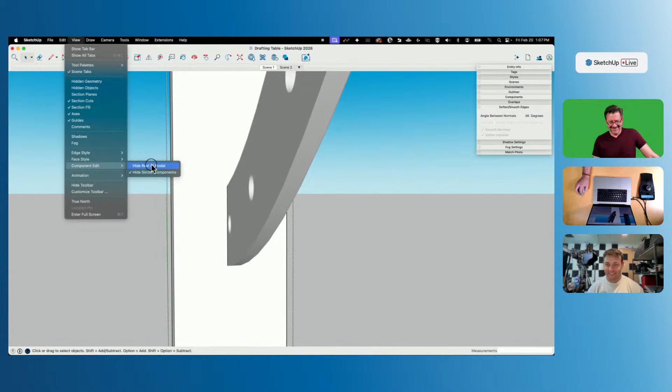Yeah, like a 1/16 of an inch. Sure. Get rid of that inside, and we just push this through. Nice, and let's see if we click out of here now.

Oh, does that hit? Oh, it does hit a little bit. So gotta go back in here, drop this down 1/8 of an inch. And then let's see how that works. Nice, yes, beauty, boom, golden.

Oh, perfect. And you got to put the pin in there now. Yes, we're not done, just when you thought we were done. Buckle up. Oh, but you know what I need? You know what I need should do? Do you know what I need should do?

I should come in here and I should grab my dark metal color and I should paint that whole thing in that black color.

Beauty, all right. Yeah, I haven't put any knobs in for adjustable or screw holes or anything. So that's the next thing I got to do.

I think what I'm going to do is do this with a cutter, so I'm going to make a reusable, copyable cutter. Most of these, I believe, should be solid. So if I click this, that's solid, this, solid. Cool, those are the only two I need to do it to.

So everything's lining up. This is the fun part of the stream. As soon as Aaron starts talking about cutters, oh, we were really cooking here. It's solid groups, materials. It's a good time.

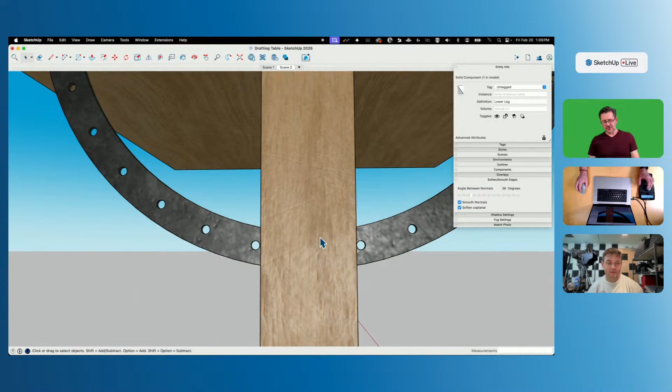All right, so what I need to do first is figure out where a circle right here would line up with the circle that is in here, because I want to put a pin through both of them so they line up perfectly. So I'm going to arbitrarily pick a spot right across the middle, and I'm going to put a circle in.

That circle is going to be 1/8 inches. Oh, this is a fun challenge, actually. Yeah, okay, that's the same size. All right, so now, how do I line that up?

Let me share with you my thoughts. I'm going to right click here, and align view. What that means is my camera is now pointed directly perpendicular, normal to the surface of that circle, so it's coming in straight at 90 degrees.

If I turn on my X-ray right now, here's my circle below. I can zoom in like this. What I can't do is rotate. If I orbit or change anything at all, it's going to take it off axis. If I ever want to make sure, I get in here close and then right click, and say align view again. There we go.

Parallel projection, that's all I'm saying. Parallel projection could work. Here's why I fear parallel projection -- this isn't saying you need to fear this, but I do -- because I will regularly snap through to different lengths or locations this way, and you can't see it in parallel.

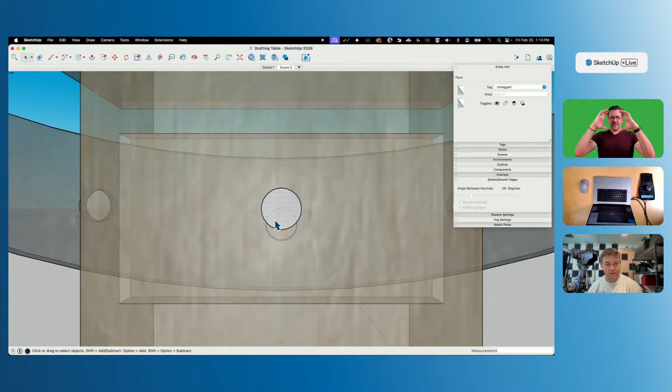But here's the thing about circles: the edges, tops and bottoms line up with circles, even if there's camera distortion. So if I grab this by the side right here, and move it strictly vertical, I can line it up with the edge there. Nice, let's go align view again. Yeah, perfect, wow. It's just that easy.

So I'm going to take that, run it through one side, take it, run it all the way through the other side, and there's my cutter. I triple click, make that into a group. All right, let's get out of X-ray.

For some reason this is all backwards, so I'm going to say reverse faces to get my white out there. I'm also going to take this and drop a copy down, straight down to here -- where, I don't care, I'm just getting it out of the way, holding onto that copy.

Dave R and Keggy are already prophesizing in the comments that by using the cutter on this, you're going to break the component. One would think, wouldn't one?

I will explain exactly what that means in case you did not catch it. So this right now is a component. If I take this and say tools, solid tools, subtract this from this, it cuts a hole through there. It's wonderful, it's great. But if I pick this right now, it's a solid group instead of a component.

Also, the inside of my hole adopted the white from my cutter rather than the wood color it should have. Double fail. Oh no, what can I do about this problem? Thanks for asking, gee whiz.

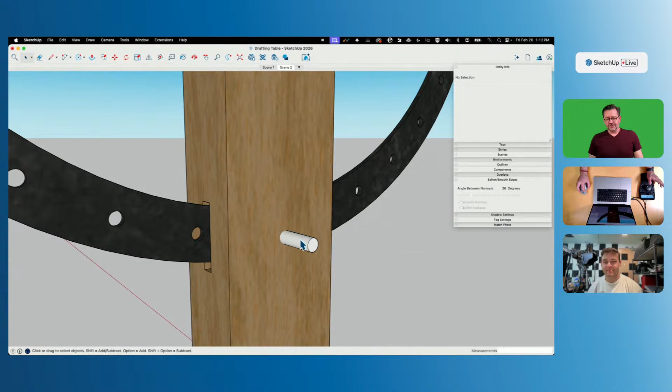So let's take care of all these things at once. The first thing is the material: when you use a cutter and it removes geometry, it takes the material of that cutting piece and puts it on the new surface it cut out. So all we have to do is come in here and put that wood material on here. Then when it cuts that hole through, it'll look like wood also. That's part number one.

Part number two: this is my component, this is my group. I'm going to go to edit and cut, and then come in context of this. Now this is raw geometry right now, so it's not a solid. What I can do is inside this component, grab all of this, make it into a group, then edit, paste in place, which brings in my pin, my cutter, select that, tools, solid tools, subtract.

From here, my thing is now cut through. And this temporary group that I was using as a solid, I'm going to right click and explode, and then I come out here. This is still a component.

Yeah, still a component. Take that, Keggy. Take that, Dave. No, just kidding.

We love you guys, but it's a very important thing because you can do a great job of breaking components and that sort of thing if you're not careful of how you use them. And we're not the only ones—there's extensions out there that will mess with components and that kind of thing too.

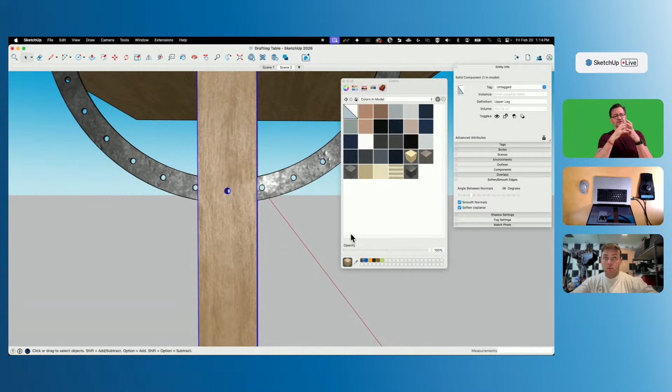There's an extension from Eneroth called Solid, I don't know, Dave will know the name of it, but it's a solid Boolean tools. Is that the one I'm thinking of, Dave? There is a tool out there that maintains the component and does that extra step of going in and doing that. But if you don't have that, then this is the way to go about it.

All right, let's get some more holes in here. So right here, I just arbitrarily dropped this in here. I did not pay attention to where that was, and that's fine by me.

I'm going to take that and copy it. Let's see, we'll come down, we'll go down 1.5 inches.

And I'm going to do that, I don't know, 8 times. Ooh, that's too many times. I'm going to grab 6 of that instead, and I'm going to bring those up.

Okay, I'm giving more options than the sample one. Yeah, sure, that's the only holes you get? Oh weak, we're going big. All right.

Not there—if you have a drill, I'm going to scale that because it's not thick enough to get through both. So I'm going to grab this and pull this through like this. We'll go big on this side too, just so I can see it.

All right, that's pretty cool.

We only want 2 of these on this piece, but the rest of them should be on the outside, it looks like. So what I'll do is take that and drag that down like that.

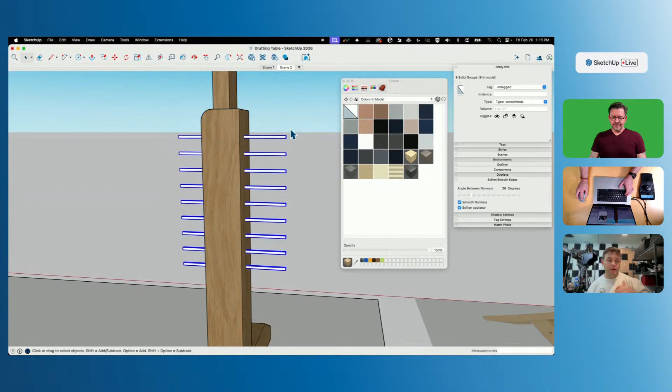And now here's the thing I'm going to do—we're going to do the same thing, taking into mind the component. I do want these all to have that same material, so I'm going to color the outside of the component that's in there, and I'm going to take all of these and right click and make that a new group.

Okay, and I think if I come in here and explode these, come out here, this now qualifies as a solid group. So solid is not about all being connected in one piece—it's about not having any geometry that's not connected and forming solid manifold chunks of geometry. So even though these aren't all connected together, they still count as a solid.

So here's what I'm going to do. I'm going to Command X to cut that, go into this piece right here, say Edit, Paste in Place. Same thing I did before—I'm going to triple click, make this into a group. Then I'm going to grab this piece.

Rather than subtract, I'm going to say trim from this one. Then after I've trimmed, I'm just going to cut this again. And there's my holes with wood on the inside.

I can select, explode this group, come out here, and now I still have this component, still solid. And I can say Edit, Paste in Place.

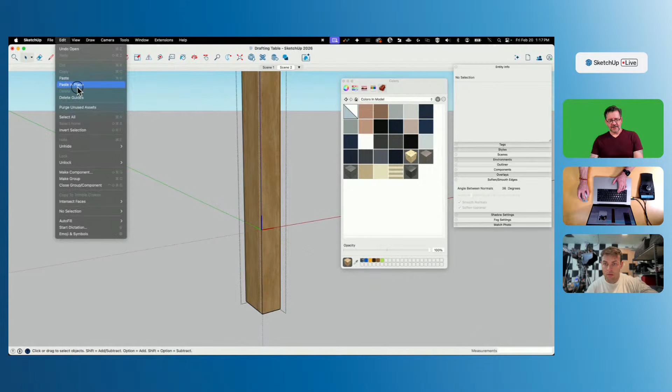Now I'm going to go into this one and say I don't want this piece or these pieces, I just want these two. And then I'm going to cut that, come into context here, edit, paste in place, triple click, make group, just like this.

This time we don't need to hold on to it, so I can use solid tools, subtract from this, and then explode that. And there we go, cool.

Yeah, that paste in place, I tell you—that's good stuff. That's good stuff. That's good stuff.

All right, we're getting there, we're almost there. What are we at? An hour and 20 minutes. Perfect, it's exactly where I wanted to be at this point. Yeah, everything's going to plan, folks.

It is fun. We have talked in the past, but you do this enough times and you start paying attention and having a feel for where things are and what's going to get done and what's not. I feel a little disconnected today, honestly. I'm like, where are we? What time is it? I don't even know where I am right now.

That's right. That's good. That's a sign of trust and faith in the world around you. When you don't know where you are, you should definitely save the file. That's all I'm going to say.

Cool, so what's next? Are you going to draw some pins? Yeah, we'll draw a couple of good-looking pins here. I know these are like screw-in knobby things, but I want to come up with something a little more elegant than that — maybe just a good-looking pin that sits in there, with a little ball spring thingy. We're gonna do something nicer.

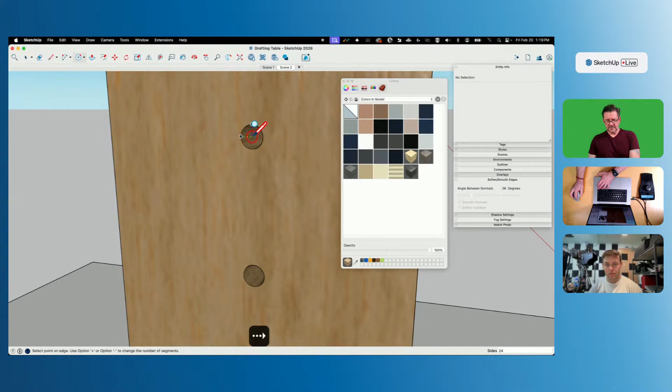Something cool. I'm gonna start here. Gonna inference again the center of this circle. Lock the axes, go like that, and push that all the way through, and then some — approximately this much. On this end I do want to taper, just to make it easier to push through the hole. So what I'm going to do is push-pull a copy of this face.

Rather than just pushing the original face through, hitting this button is going to give me a new one. So what that lets me do is pull this through like this. I can grab this, hit scale about the middle, and we have a real quick and simple result.

Yeah, scale from the middle is really nice. That's another one of those modifier keys. It is a huge time saver. Yes, agree, 100%. And one of those that I didn't ever use for a long time till I realized just how dumb I really was. I know. The scale tool is like the original flip tool — it's got some history.

That's exactly right. All right, and then I'm going to offset this a little bit. I'm going to use my black plastic. This is going to give me a slightly different finish than what I got from the black metal, so this is going to look a little different.

Dave R is always dropping ideas into the forum here that are very beautiful and very advanced.

All right, I want to give a little bit of a handle here. I'm having a problem again with the material, so I'm going to switch back to my other scene. I'm going to go option push-pull again, grab this one, and scale it up.

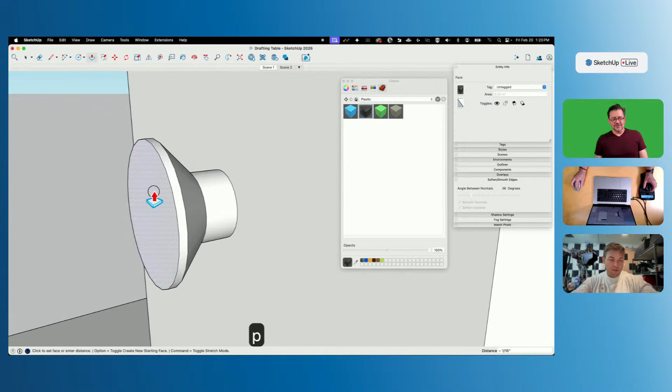By the way, I should point out, Justin sounds like he's teasing Dave, but I have no doubt that whatever Dave's saying is probably a good idea, and you guys should check it out and try it. Absolutely, but I'm not doing it right now because, well, first, I'm 30 seconds ahead of Dave, but also because... sometimes you wake up and you're just feeling a little stubborn. And that's okay.

All right, so that's my little pin. I'm going to use that instead of a screw piece in there. Like I said, I'm going to assume there's some sort of retention geometry happening in here with a little ball spring or something like that — something to keep it from rocking back out. Sweet, but that's that, and there we go.

Nice, now I need to move that down. So here's the thing: I covered up this hole, so I can't really inference off of that hole. But I don't need that hole because I can move it in reference — I can come to this hole right here, one below, option copy, one down to the side of this hole. Oops, I didn't group that at all. Okay, let's try that again.

There we go, try that again. So if I go from the side of this one down to the side of this one, here we go. Oh, I didn't hit option.

Woo! Watch this. Remember how we were talking about how cool paste in place is? Yeah. Copy, paste in place, Command Z. I got it — edit, copy, undo to put that back. And then we go to edit, paste in place. Almost like I meant to do that. Boom — I did not mean to do that though.

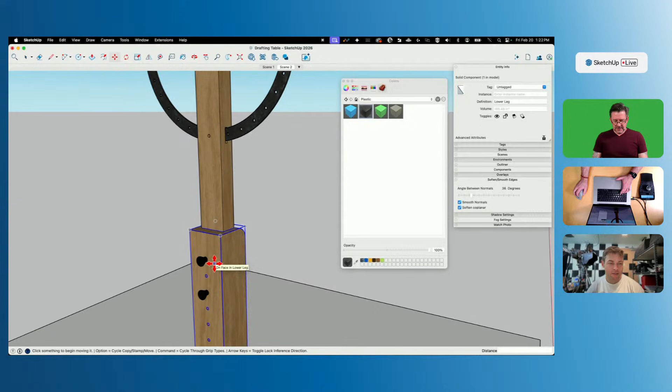I'm going to try an X-ray because I want to reference the circle on the inside. So I'm going to grab from there, option to make a copy, and then pin it right there. Ooh, that seems like it could hit your knee.

Okay, so let's make this unique. Yeah, that's going to go right through your knee. And we'll call it pin 2, rather than this pin 1, and make it short. I won't remember what 1 and 2 is, but I'll remember that this is shorter.

I'll grab that piece, slide it back like that. There we go. Much gooder. Sweet. So that half is looking pretty tight.

Here's what I'm going to do. I'm going to grab everything that is on that side, not the top, just this. I'll right click and make a new component out of that. That is the leg assembly.

Nope. Third try's a charm, okay. And then I'm going to mirror a copy of that across the middle. I'll just find the midpoint there. Boom, there we go. Boom.

Get rid of X-ray. Okay, so overall, my observations are the legs look a little tall for the size of the top. Yeah, they do. Let's make the top bigger.

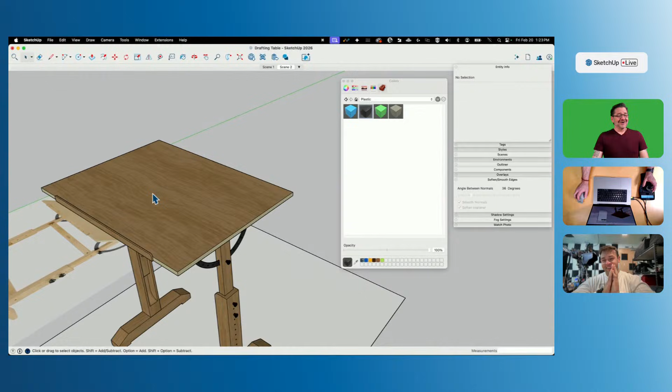Scale from center. Okay, so we could do that, but the issue we'd run into, for real, is if we scale from center, we're going to make this taller, we're going to stretch it. Yeah, you're right. What I could do instead is come up here and say, okay, that's inside a group.

So come this way, maybe we'll add 4 inches on each side. Yeah, that's way more sensible.

Double-click. Don't listen to me. Double click. Hey, you got a microphone. I mean, somebody's listening to you. Hey, well, if you double click that side, then you got to move the pencil thing.

That's right, we're moving this way, 4 inches. Nice. And we should, yeah. Okay, you're right, I agree with you. That looks good, hey, that feels great.

Like we need to bring the legs out a little bit too. Yeah, give me some more space here. So I'm going to grab this, slide it this way. Yeah, 4 inches, nice.

Okay, love it, now we're love it. All right, save. And if you recall, I said I do want a section to the right that stays flat when this, when this up. So I'm going to do that by coming in here.

I'm going to grab this whole piece and copy it, Command C. I'm going to say edit, you guessed it, paste in place. Boom. And then I'm going to move this over to here.

I will say that I have it set up so that paste in place is just a shortcut key for me. But it's worth it, guys, like if you are paste in placing all the time, it is very much worth it.

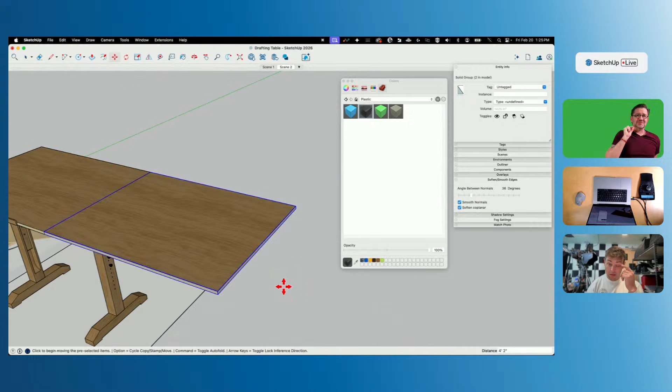I would say that, I mean, Justin and I have zero control over what happens in the software, but if I had the ability, I would have an option somewhere that says replace paste with paste in place. That was actually a totally correct sentence. Yeah, but I think I would use that all the time.

Agreed. All right, so this is going to be our little extra flat section. I don't want to make this huge. I want to see where's 12 inches at. 12 inches even seems big, let's go like 8 inches. Just a little strip on the side that I can put stuff on is all I need.

So I'm going to come in here. If I come over 8 inches, where's that? All right, and then what I'm going to do is just push pull. I don't want to distort anything.

So when you push pull, you're moving geometry and the projected texture stays there. If I use scale or something like that, then it would squish the texture down. But push pull actually lets me lengthen and squish geometry without messing that up.

Yeah, if you're ever working with a model and you see that a texture has been warped like crazy, it's probably because the geometry has been scaled. Probably so. All right, so now I need to find a way to support this.

I think what I'd want to do... this is where we're off the rails at this point, folks. We're four-wheeling, we don't know where we're going or how we're going to get there. But we're safe, trust me. Are we? I'm an expert. Okay, famous last words.

What are we thinking here? So are we going to attach it? If I want, this has to be connected to the rest of the table. I can't just run a separate leg down. I don't want to do this whole assembly another time, right?

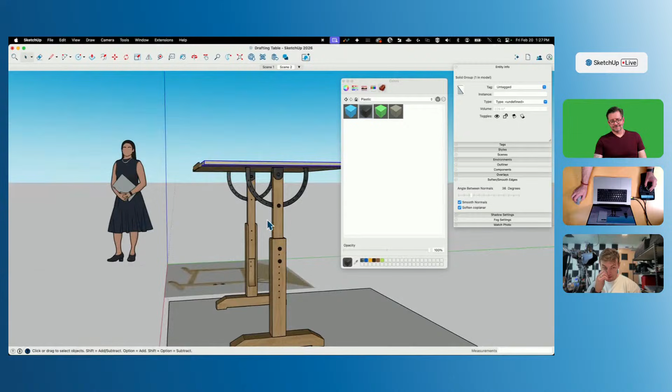Yeah, Kegi says bracket off the top of the leg. But see, if I come off of here, then the top's gonna move without it, and it's gonna stay at the consistent height. If I connect it to here, then it's gonna stay connected here. So I think that's the easiest way to do this.

As far as the simplest connection, I'm kind of thinking if we did some kind of a plate here, and then that could jump over. It needs to come all the way out to here though. So it could be a plate that comes out at a 45-degree angle at the top and then goes flat, like that.

Sure, I don't know guys, we need some ideas, chime in the chat, what should we do? So I'm going to bring over a line perpendicular like this. I'm just going to draw this while you guys tell us the better way to do it. I'm going to go vertical, and come out like 6 inches, there we go, like that.

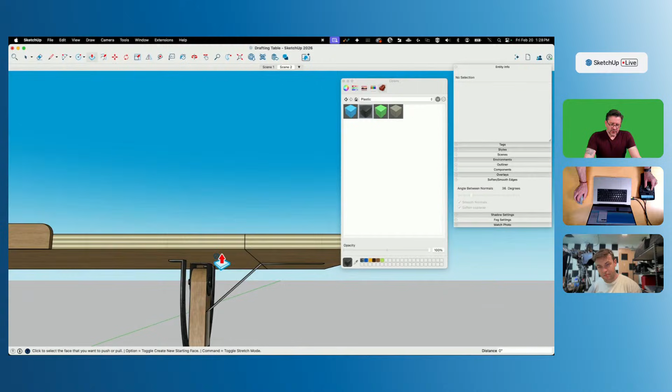So this... obviously we need to reinforce this more and make it bigger, but something like that. What would probably make more sense is something like this. This will be the most expensive part of the entire piece, but actually something that goes straight up like this, it'll have to come out more.

Maybe Dave R can just model this real quick and drop us the file. Actually, no, we can't. So this does have to come out. This piece right here would have to come out past this pin.

Kegi says, I'd also group the hinge bracket and the D-ring with the tabletop rather than as part of the leg assembly so it rotates with the top easily. 100% correct, yes, that is what should happen. But then Randor 10 says, how would the Roadrunner cartoonist do it? So we're getting a lot of ideas here, valid points.

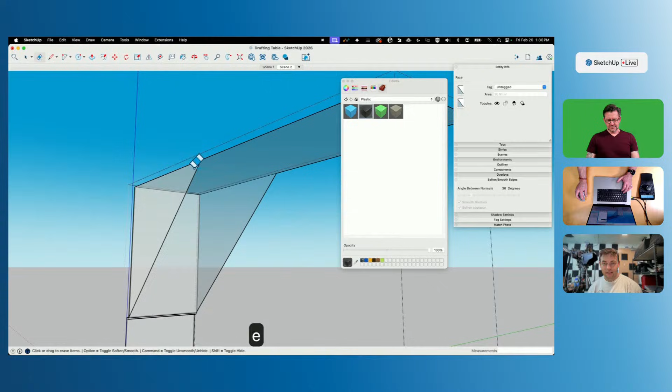All right, so at this point I may be close to in get-her-done mode. That's so right, take this, give that. This is some custom metal work here. Yep, absolutely. So I'm going to get rid of these temporarily.

All right, so let's get rid of that. And I think we could give more of a like a this. Yeah. I like this, end of stream, get-her-done mode.

I feel like there's a giant adrenaline rush for us as streamers here. Maybe not for Aaron, but for me, in the very beginning, and then at the very end when we need to rush to the finish line.

Here we go. All right, and then cool. So that's kind of cool. I think what we'll do is this portion right here.

Do you need to cut a circle into it so you can access the hinge? That's thinking right there, that's practicality. That's right. Come this way. Oh, actually not there.

Okay, all right, so we did something like that. We need to put more reinforcement here, and I think we need to kick up some kind of a brace as well. Yeah, so here's what I'm thinking.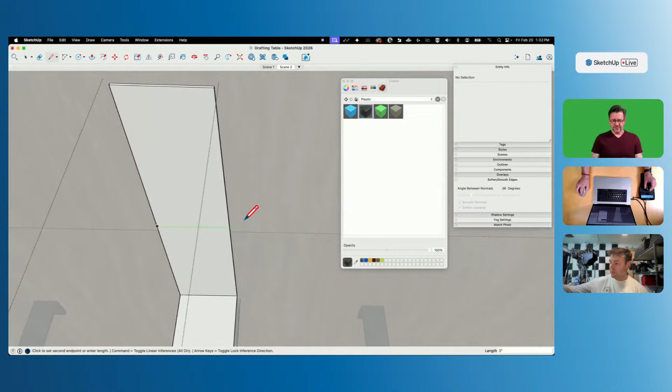Let's go to view and unhide the rest of the model, because I think right about here, I'm gonna make this a little wider.

All right, okay cool. Yeah, stable enough to hold a coffee cup. That's what counts. I think it'll be stable enough, I think. All right, so then the other thing, let's take this.

Let's start by painting it the correct color, and then we will put our circle X-ray. Ooh, you can align that view. Yeah, I'll do the same thing I did before. Let's find the middle point, turn off X-ray for it right now. I'll probably go to this too. Come straight down.

Then we'll go align view, come over here, turn X-ray. View, component edit, unhide rest of model. I do actually have that as a shortcut, I just forget which button it is. There we go, and then I'll just push that through.

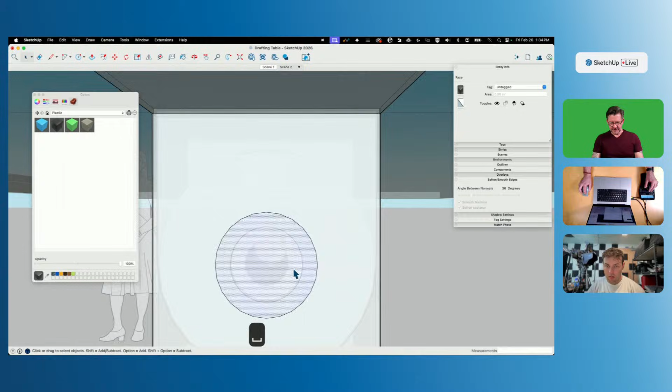Look at that, practical design. See, and that was Justin, I credit where credit's due. Justin remembered that, thought of that. Yeah, that's right folks, it's all me. Well, I'd say all, it's just knowledge. Yeah, you did the modeling.

Cool, this is looking good. So I do want to put some just another piece maybe coming up here because I don't feel comfortable. It's making me, let's see if I can follow this angle. Does that get me? No, not quite. But I think I could make this in theory be all stamped out of a single piece of material. So that's kind of cool.

Because if we have this, so this could be folded. So when it's stamped, it could be stamped out like this. And then this could be folded up and then have a little piece of material that's welded or screwed right there. So in theory, that could all really happen.

And then I'm going to copy that geometry option from there to there.

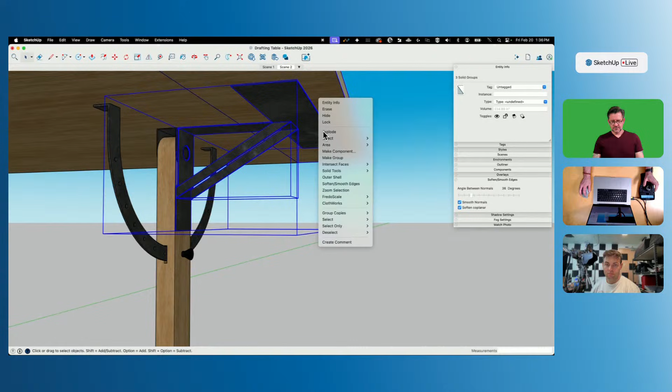Nice, so you just made that modular. So if you didn't want that, if you don't have a Luxo lamp, you want a spotlight, you can just slide that right off.

Now, yes, so address a couple things. This assembly right here, yes, should be cut. And then come into context here, edit, paste in place. That is where that should go. And if I go from here straight across to here...

2.5 inches. So we come in here and just grab this and just grab all that. Option, make a copy, go this way, 3 foot, 2.5 inches. And then that should be cool. That, beauty, nice. Actually, this piece too.

Well, hold on, that should be there too. Because that'll be connected to the bottom, not the top. All right, and then or the top, not the bottom. And then I'll just mirror this since this does have a left and a right. Oh, I guess I should mirror that too. Yeah, let's just grab all this.

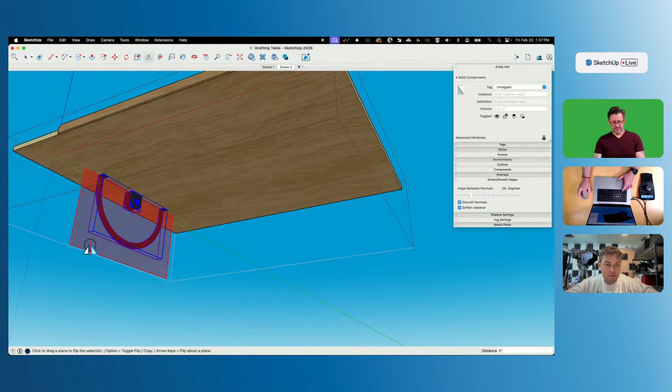There we go, and find the middle. All right, there we go. Nice, now if we want to take this piece and rotate it. Oh, I still have a spot here, so here, let me do a thing.

I'm going to go in here to this, right click and say add snaps. And now I'm going to inference where the middle is one last time. There we go, and let it come out straight like that. There we go.

So now if I go to move or rotate, that snap shows up. So what I can do is I can come out here, select this, go to rotate. Oh, I put it in too deep, I put it too far in. Oh no, there it is, it's still inferencing it. And now I can just say how much do I want to rotate that? Go to 30 degrees, perfect.

And there's our one side of our desk stays flat. One side rotates. That looks mechanically sound, I will say.

Let's go grab Luxo, I'm going to save, file, import. I don't want to catch anybody off guard, but Luxo might not be to scale. Actually, it's pretty good, not too far off.

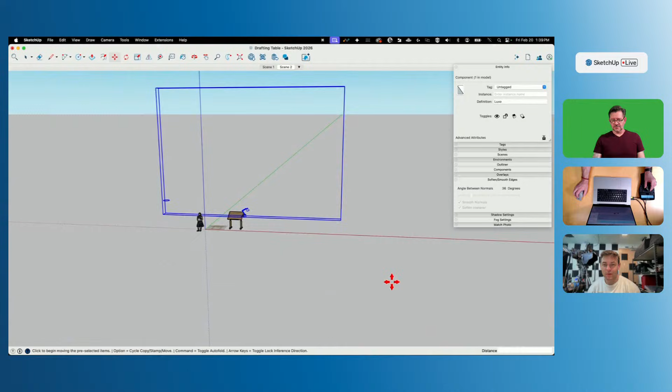Whoa, yeah, whoa, what you got? What you got in there? Some stuff. Okay, I don't know how that happened. Probably because I scaled this too at some point.

I feel like in situations like this, I just select the lamp and then copy. Yeah, that's probably what I should do. I should just come down here and go. Cut, edit, and regular paste.

Had you guessing on that one, huh? Still a little too big, it's still a little oversized. Yeah, so we'll just scale her down. You need to extend the right edge of the little side table.

But yeah, that looks great. Got a couple people in the comments saying the bracket will stop the table from rotating, but I think you're right. Look at that, this is a terrible design. Terrible, you guys. All right, we're in the last 20 minutes here. You can't throw a wrench in our plans like this. Apparently they can.

All right, let's go to... okay, I thought I had a good solution there, but yeah, that should be supported from below. Absolutely. Let's do a thing. It's kind of too bad because I did like Justin's idea of the hole here, but yeah, maybe we should just go like this.

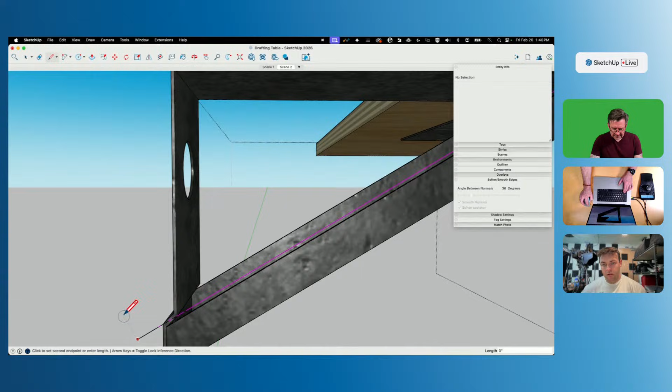I'm gonna quick and dirty this thing. It's a design term. That's right.

The custom metal work is getting even more custom. Yeah, still costs less than the birch. Birch, yeah, big birch. All right, and here I'll bring this. It's a hell of a nickname, Big Birch. Sounds like a baseball player or something. Yeah, totally, Big Birch steps up to the mound. Yep, some kind of wrestler.

And to be fair, those comments were rolling in like probably 5 minutes ago already. But you know, sometimes you're just in a flow, Aaron, and I just don't want to interrupt you. I appreciate that, for real.

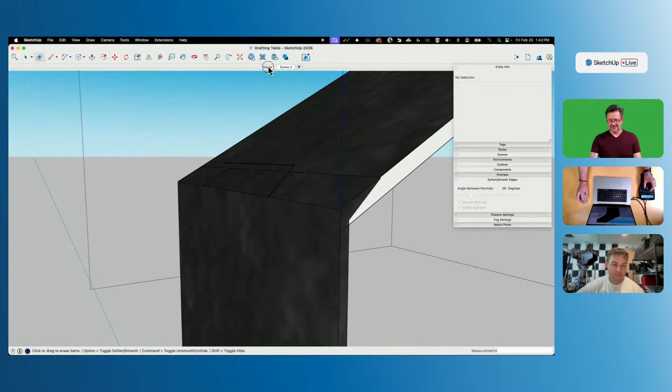All right, let's see what I'm modeling here. Yeah, okay, this qualifies as a prototype. I don't know if this would actually work or not, but I don't know. Reality has not always stopped us in the past. So yeah.

Cool, nice. Yeah, what the? This is what scrambling at the last minute gets you. Oh, what, hollow metal? It's going to be lighter. Oh, because there's nothing up here to connect. Oh come on man, your first time modeling live? What the heck? Okay, it doesn't look like the bottom's connected either. Nothing's connected, seeing a profile there. It's all just... oh, it's just a mess. It is just a mess.

What is going on? Okay, so there, and then here I have to come back like this. Okay, there we go. Okay, we're closed up now. We're good, well, we're cooking. We're better, we're maybe not good, but not as bad as we were. We're all right, that's where we're all right. I can say with some authority, we're all right. Yeah, we're doing good, guys.

Oh, son of a gun. There we go, all right. Orient some faces. Is this open? No, it's closed. Oh, because it probably has some internal faces.

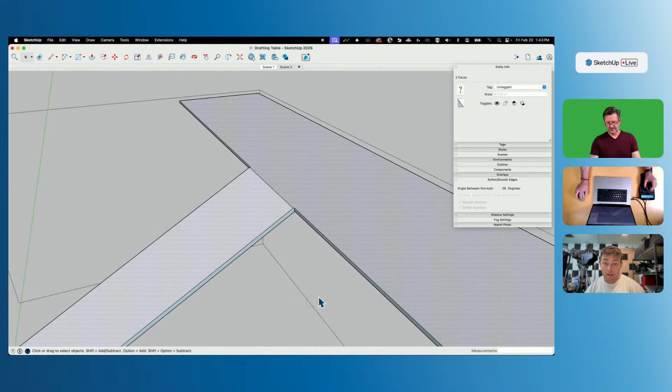Cool, there we go. Now let's check our materials. And we still have our braces on here, so it's stronger even. Yeah, that should work, that should hold that up. And we're clear, and that rotates nice.

Whew, I appreciate you guys being on that, and I apologize for us totally blowing you off. Nice, that was cool.

I feel like, like Dave was saying, some edges to that would be nice, so that your tools don't roll off the side table. Let's see if we were to do something simple. Let's just do a little, like a quarter inch.

Yep, that looks good. Transom says this table is for right-handed people. Yeah, yes it is, you're right. I mean, you could mirror the whole thing, but we're scrambling here, folks.

Yeah, we could. Well, I'll come up with an alternative. We'll take the whole table and we'll flip it. Follow me. Nope, I got to bring that in. Come on, get, stop it.

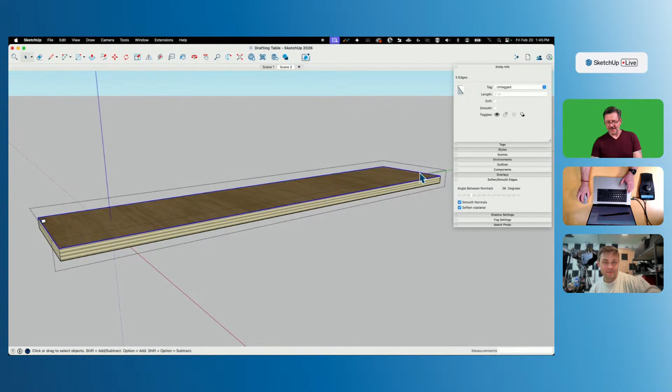I wonder what these streams would be like if we did it Monday morning. Like, would it be polished and buttoned up? I don't know, who's to say? Yeah. Monday morning, they'd probably be late first off. Yeah, every single time.

Home, put this, nope. A little bit of an accent, little plastic piece there maybe. Hey, that looks nice, that looks cool. I could see some tools on there, some snacks, some coffee. Right, if we group this, nice place for your cat to hang out.

It's good. At any point anyone likes, just go left-handed. The nice thing about this table design is that it's modular. That's right, a couple screws in here, maybe we didn't put them in, but who cares? Oh, yeah, all right, boom. That's it baby, look at that.

All right, let's work on a beauty shot real quick. Aaron's trying to get out of here guys. I made it all the way to the end again without my favorite visual artifact. No ambient occlusion again.

You guys, oh it looks so much better. Oh, don't forget to throw a shadow on there. A little more intense, let's get intense. Would love to see some shadow on the ground there. Oh yeah, absolutely.

And look at our material shining back a little bit. Let's get some shadows worked up.

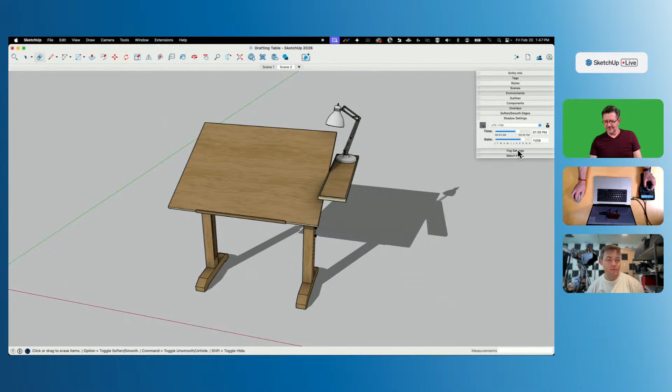Mark on YouTube says this layout is actually for lefties - you will always have a shadow on your pen because your right hand is blocking the light. Genius, wow. Keggy says Monday stream would be lonely for you guys, I suspect. I have a feeling you're right. Yeah.

All right, there we go. Look at that thing, that was fun. That was a fun little project, a little bit of design work. Agreed, a little bit of modeling tips. I like when it works out that way.

Brad on YouTube says it still needs a cross brace between the legs. Oh, I get it, you're absolutely right. Yeah, I kept thinking last minute about going back to that, and I didn't. Any last minute modeling ideas that you guys have, squeeze them in - no, just kidding, don't do that. We're running out of time here.

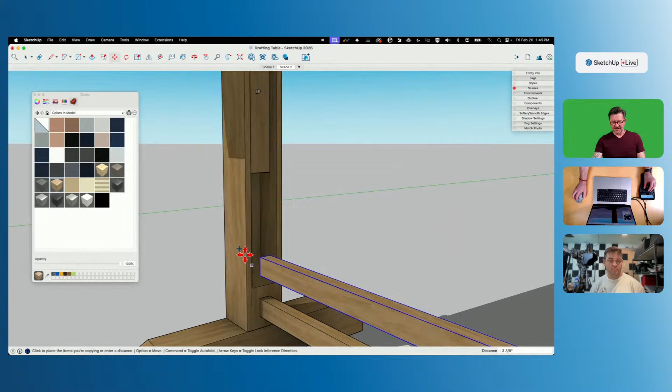We'll take that and we will move a copy of it vertically up to here above. And then we will take this one and we'll stretch it to here and to here. There we go. Now we're done, now we did it. I love it, all right. I feel like it's deceptive - I say this having done none of the modeling whatsoever, but I feel like this looks deceptively simple, but there's a lot of thought that went into this, a lot of design intention.

You know what we're missing is that architectural fog. There we go. Yeah.